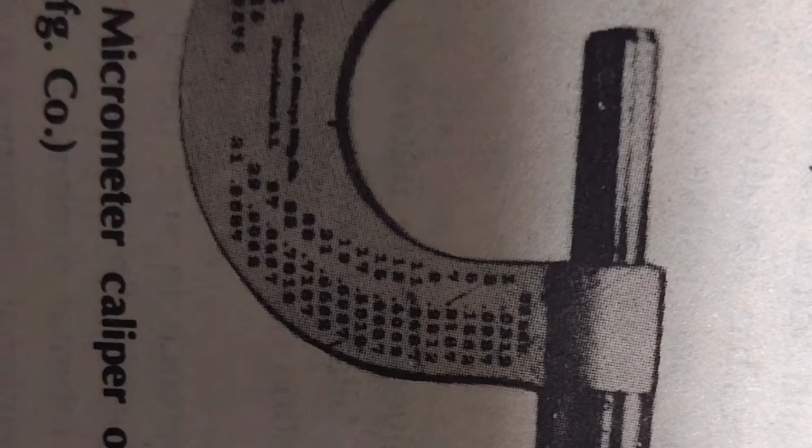Now this figure. In 1885, the same man introduced a new model which is almost identical with those in use today. Compared with the rule, the micrometer is a newcomer in the field of measurement.

The regular micrometer, usually referred to in the shop as a mic, is used for measuring outside dimensions. It is available in many sizes. There are several other types of micrometers, but all follow the same fundamental principle.

As we say, the mic is probably the most commonly used precision measuring tool. A standard micrometer designed to take readings from 0 to 1 inches is shown in this figure.

In this figure, the different parts are also shown, such as frame and anvil, spindle, hub and thimble.

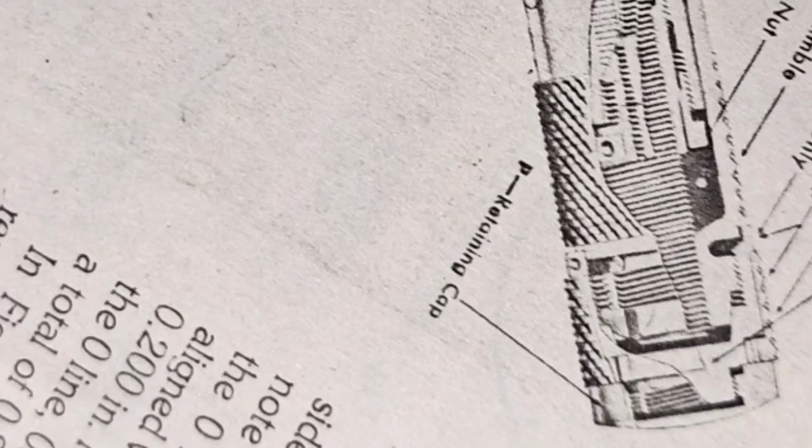In general, the use of this presents little difficulty, but a certain degree of skill and appreciation of their precision construction is required if accurate measurement is to be attained. In common with all precision measuring instruments, considerable care is necessary in handling them to avoid unnecessary and costly depreciation.

Micrometer instruments manufactured in the United Kingdom should conform with the requirements of British Standard 870, external micrometers, British Standard 959, internal micrometers including stick micrometers, and British Standard 1734, micrometer heads.

It should be appreciated that the degree of accuracy in using these instruments is governed by the permitted tolerances in the standards.

For example, the maximum permissible error ranges in the traverse of micrometer screws is 0 to 0.0001 inches or 0.003 millimeter.

For British and metric reading micrometers measuring up to 12 inches or 300 millimeters, it is 0 to 0.0002 inches or 0.005 millimeter. For instruments measuring 12 to 24 inches or 300 to 600 millimeters, the tolerance is correspondingly greater.

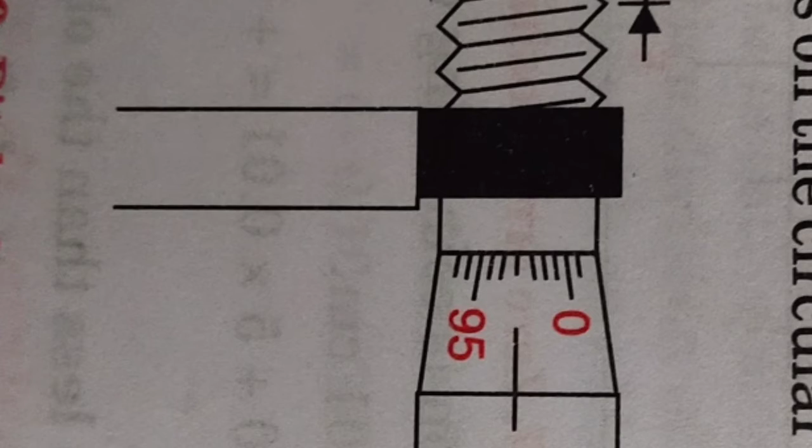Here I am giving the metric as well as the British one also, in inches and also in millimeter or micrometer, but here I am discussing about the millimeter one.

If each division is 1 millimeter and there are 100 divisions on the circular scale, then least count equals 1 millimeter by 100, that is 0.01 millimeter, which equals 0.001 centimeter, which equals 0.00001 meter, which equals 10 to the power minus 5 meter, or 10 micrometer.

Since the least count is of the order of 10 micrometer, the screw is called the micrometer screw. Screw gauge and the spherometer, which work on the principle of the micrometer screw, consist essentially of two scales.

Number 1, linear or pitch scale. It is a scale running parallel to the axis of the screw, graduated into millimeter or half millimeter. Number 2, circular or head scale. It is marked on the circumference of the circular disc or the cap attached to the screw.

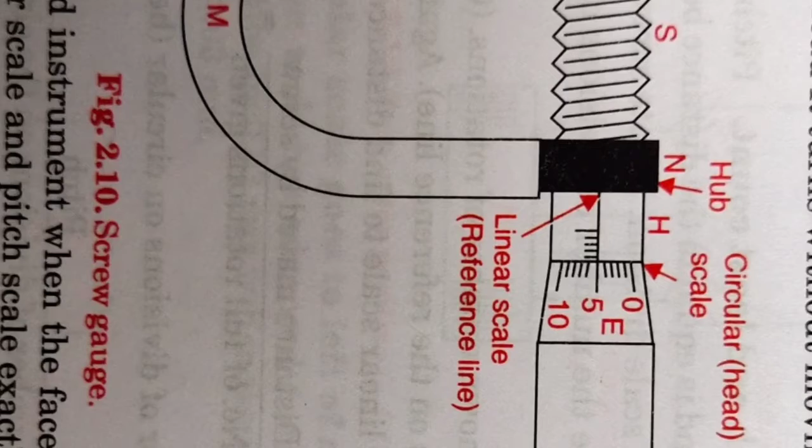In an accurately adjusted instrument, when the faces A and B are just touching each other, the zero marks of the circular scale and pitch scale exactly coincide.

Now, what is zero error and zero correction in this micrometer? In some instruments, either due to wear and tear or due to manufacturing defect, the zero mark of the circular scale does not coincide with the zero of the pitch scale when the faces A and B are just touching each other. Such instruments possess zero error and zero correction.

If the zero of the circular scale advances beyond the reference line, the zero error is negative and zero correction is positive. If it is left behind the reference line, the zero error is positive and zero correction is negative.

For example, if the zero of the circular scale advances beyond the reference line by 3 divisions, zero correction equals +3 into least count. And if the zero of the circular scale is left behind the reference line by 3 divisions, zero correction equals -3 into least count.

Now, backlash error. On account of wear and tear or loose fitting, there is some space left for play between the screw and the nut. In such instruments, if the screw is advanced by turning it in one direction and then rotated back, the screw may not move along the axis despite appreciable rotation of the head.

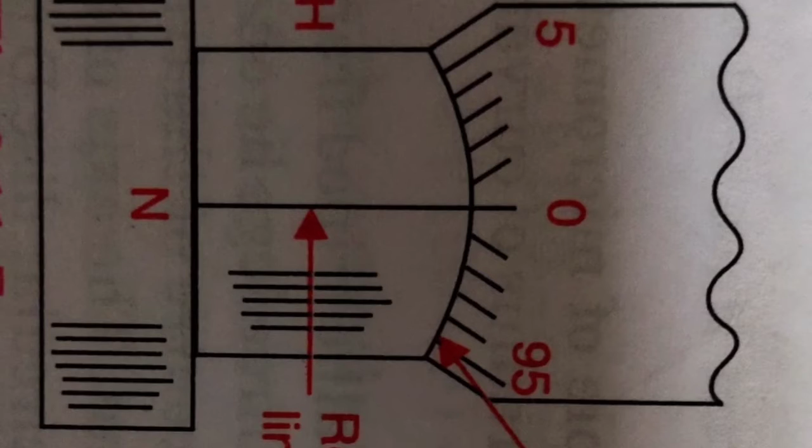Now number 2, zero mark of circular scale remains to the right of the reference line and does not cross it. Here I will give you a figure. Here the second division on the circular scale comes on the reference line. Zero reading is already 0.02 millimeter. It makes zero error plus 0.02 millimeter and zero correction minus 0.02 millimeter. Actual thickness will be 0.02 millimeter less than the observed, that is measured thickness.

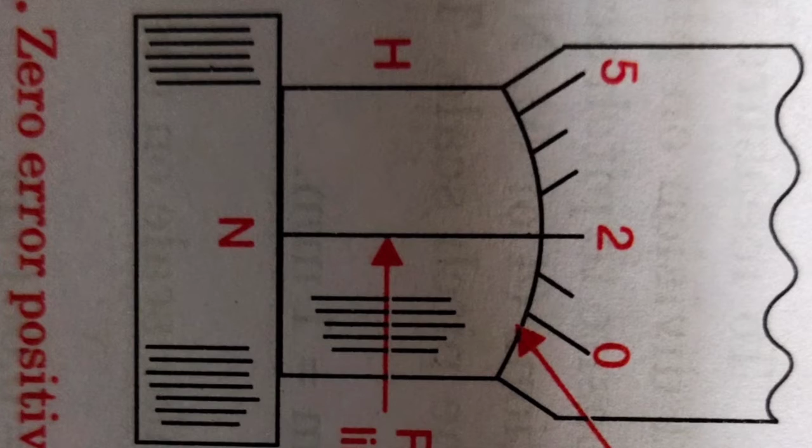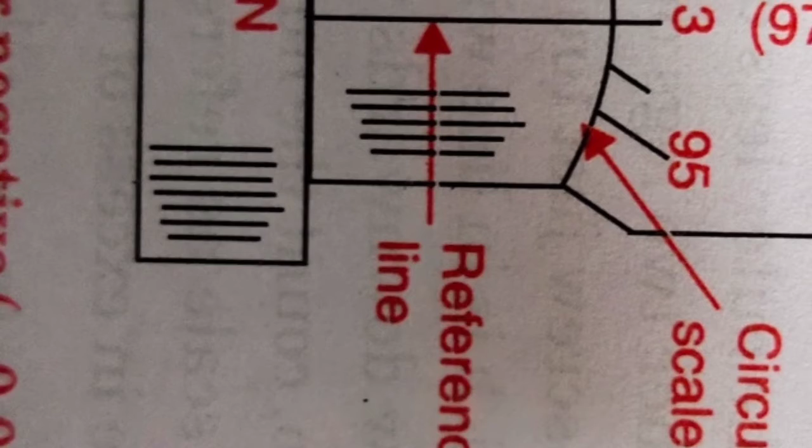Number 3, zero mark of circular scale goes to the left of reference line after crossing it. Here zero of the circular scale has advanced from the reference line by 3 divisions on the circular scale. A backward rotation by 0.03 millimeter will make the reading zero. It makes zero error -0.03 millimeter and zero correction plus 0.03 millimeter. Actual thickness will be 0.03 millimeter more than observed, that is measured thickness.

Now what are the graduations of a micrometer? The graduations on the sleeve of the micrometer are 25 thousandths, 0.025 of an inch, apart. Every fourth division on the sleeve is marked with a number from 0 to 10, thus identifying each 1/10th of an inch. There are graduations either in millimeters or in inches, two different systems.

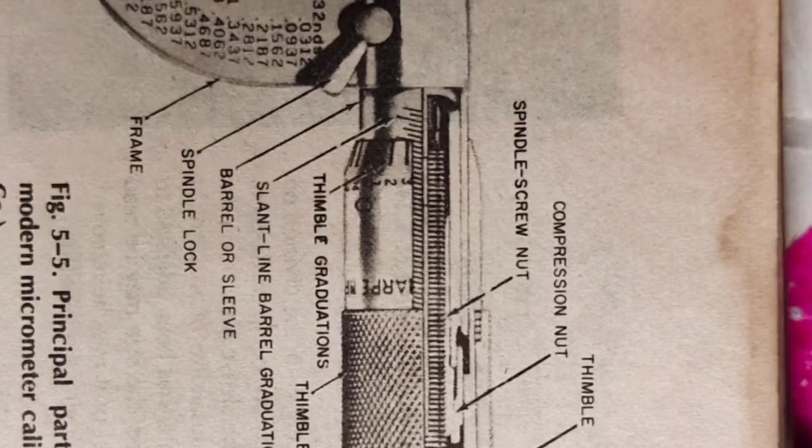The graduations of the thimble represent divisions of 1000, that is 0.001 of an inch. This is determined as follows. The edge of the thimble coincides with the 0 on the sleeve when the micrometer is closed. Each time the thimble is turned one revolution, it moves along the sleeve one graduation or 0.025 inches. The circular edge of the thimble has 25 equal divisions etched on it. So when the thimble is revolved just enough to equal one of the divisions, it has moved along the sleeve 1/25th, that is 1/25 of 25 thousandths, which is 0.001 of an inch. In some micrometers, only every fifth division is numbered.

Now the question arises, why does the thimble of a micrometer move along the sleeve exactly 25 thousandths, that is 0.025 of an inch, for each complete revolution of the thimble? The inside of the micrometer is threaded so that each time the thimble is turned, it moves along the sleeve in the same manner as a nut on a bolt.

These threads are made 40 to an inch. So when the thimble is revolved one complete revolution, it moves along the sleeve 1/40th, that is 1/40 of an inch, which equals the decimal fraction of 25 thousandths.

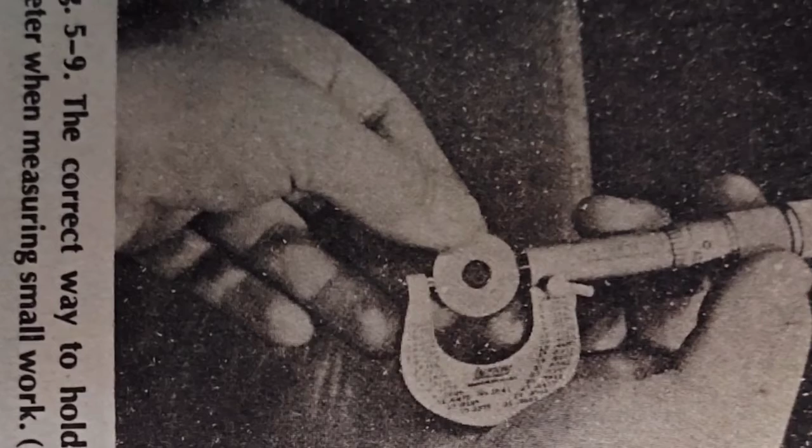Now, what is a ratchet stop on a micrometer? A ratchet stop, as given in the parts of the figure, is a device that prevents the use of too much pressure when adjusting a micrometer on a part to be measured. The ratchet prevents further turning of the thimble after the correct amount of pressure has been applied to the spindle to get an accurate measurement.

Now, can dimensions be accurately measured with a micrometer when the permissible variation is less than 1000, that is 0.001 of an inch? Yes, with ordinary micrometers it is possible to estimate one half of 1000, that is 0.0005 of an inch, when the revolution line on the sleeve comes in between two division lines on the thimble. For accurate measurements of less than 0.001 of an inch, a micrometer with a vernier scale on the sleeve should be used.

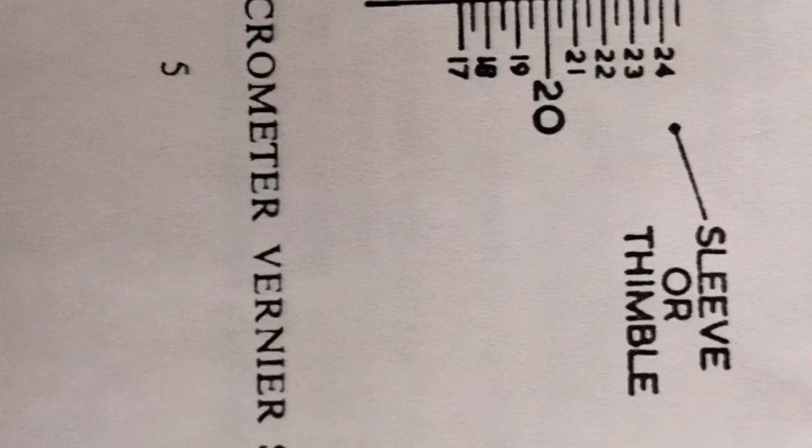Generally, vernier scale micrometer sleeves are graduated into 25 divisions and 25 half divisions. A convenient vernier scale length equals 9 half divisions of the sleeve scale, divided equally into 5 vernier scale divisions, and these are engraved on the barrel above and parallel to the full extent of the datum line. Thus, the vernier scale length is equal to 9 half divisions on the sleeve.

That is 0.0045 inches. It follows that the difference in width between each sleeve division, that is 2 half divisions, and each barrel division is 1/5 of a sleeve division. Each sleeve division is representative of 0.0005 inches. The difference is therefore 0.0001 inches. Now, when a sleeve graduation line does not coincide with the datum line, it is necessary to note the vernier scale division which does coincide and add the number of 10,000, that is 0.0001 of an inch, to the standard thousandth reading.

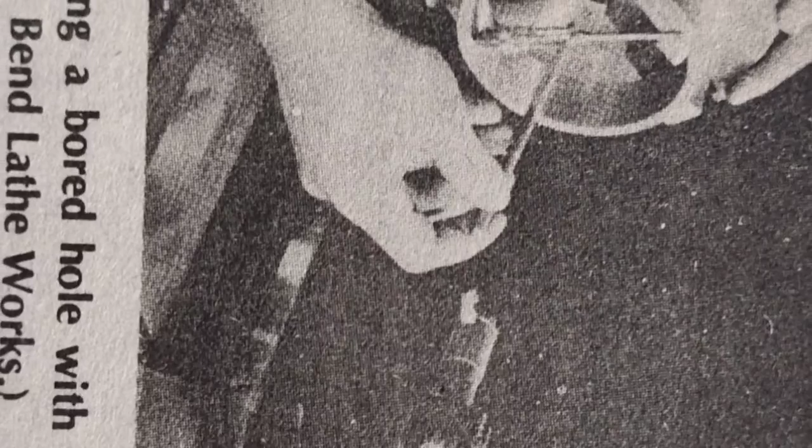Now, in the types of micrometer, first we will go for other than the standard type of micrometer for measurement of external dimension in British or metric measurement. There are several other types of a special category for various manufacturing processes, curve profiles, and for the measurement of soft materials, etc. Some of the more common of these and their particular applications are described in the following paragraphs.

Number one is variable range micrometers. These instruments are made with large frames, and a set of detachable anvils is provided to cover each stage of measurement throughout the total range. Ranges vary, but common examples are 0 to 6 inches, 0 to 12 inches, 12 to 24 inches, 0 to 50 millimeter, 200 to 300 millimeter, and 900 to 1050 millimeter. Stages of measurement are generally 1 inch or 25 millimeter. It will be appreciated that the shortest anvil will be fitted for the longest measurements and the longest anvil for the shortest. Various methods of anvil location are employed, but most anvils are provided with a flange or shoulder which abuts the frame face, and this ensures that the basic anvil setting is correct when the anvil is fitted.

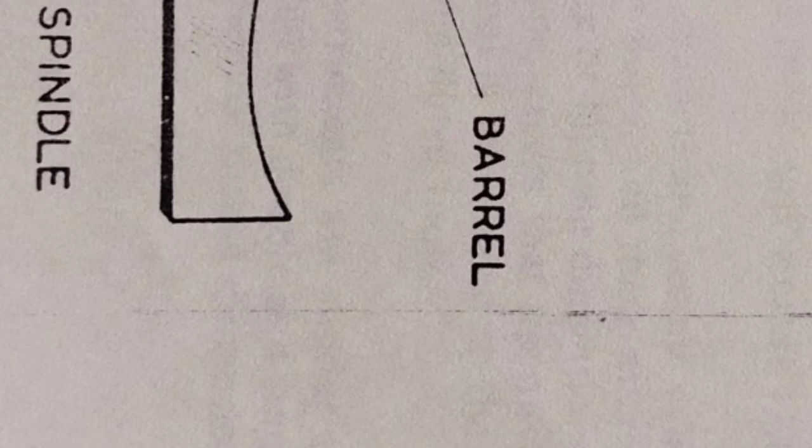Here one more thing is to be noted: the graduations are read in the same manner as a regular micrometer.

Now the tube micrometer. This micrometer is similar to the standard type except for the frame and the anvil. The frame is usually of single jaw C-shape, and the anvil is a vertical hardened and ground spindle post fitting into the frame at 90 degrees to the spindle axis.

Generally, these instruments are supplied with several anvils which differ in the diameter of the measuring tip, and this feature serves the instrument a wider range of tube thickness measurement. A tube micrometer is specially designed to measure the thickness of the material of piping, tubing and similar shapes.

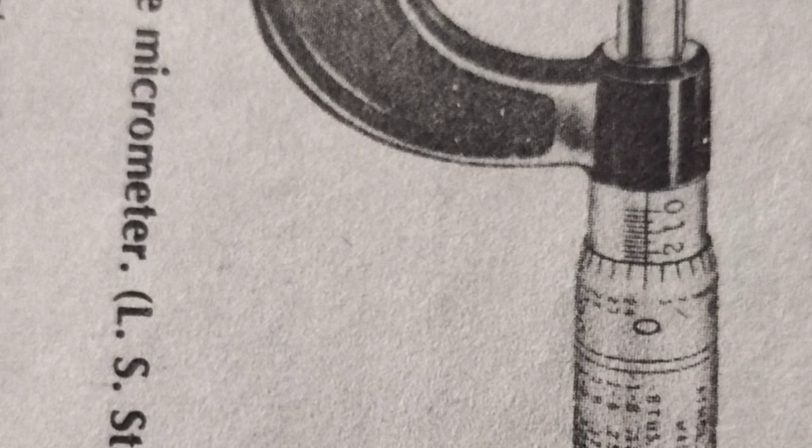Now what is an inside micrometer, which we have discussed, but let's see. An inside micrometer is designed with the same graduation as an outside micrometer and is adjusted by revolving the thimble in the same way. It is used for taking internal measurements where greater accuracy is required than can be obtained with inside caliper or telescopic gauges.

It is available in many sizes. Now the figure shows an inside micrometer in use, and shows the inside micrometer caliper.

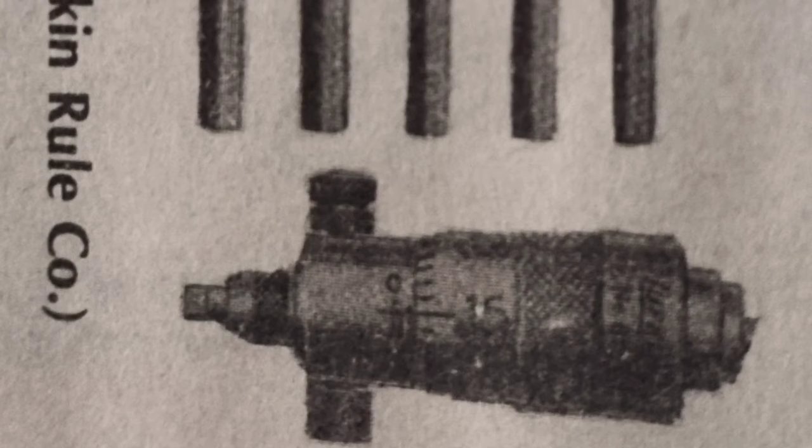Now what is an indicating micrometer? An indicating micrometer combines the precision of the dial indicator for uniform contact pressure with the accuracy of the micrometer screw for measuring.

The graduations on the sleeve and thimble are the same as on a regular micrometer. The indicator dial registers divisions of 1/10,000, or 0.0001 of an inch. In measuring with this type of micrometer, the size is noted on the sleeve in thousandths of an inch, and then the number of 10,000ths shown on the dial by the indicator finger is added.

The indicating micrometer may also be used as a comparator. For this purpose, the spindle may be clamped in position to a required dimension.

By tightening the ring nut on the spindle when it is to be used in this way, the two larger hands of the indicator are adjusted on each side of zero to indicate the amount of variation permitted above or below the required dimension. If the indicating finger is moved outside of the two hands, then the part being measured is too large or too small, depending upon which direction the finger moved.

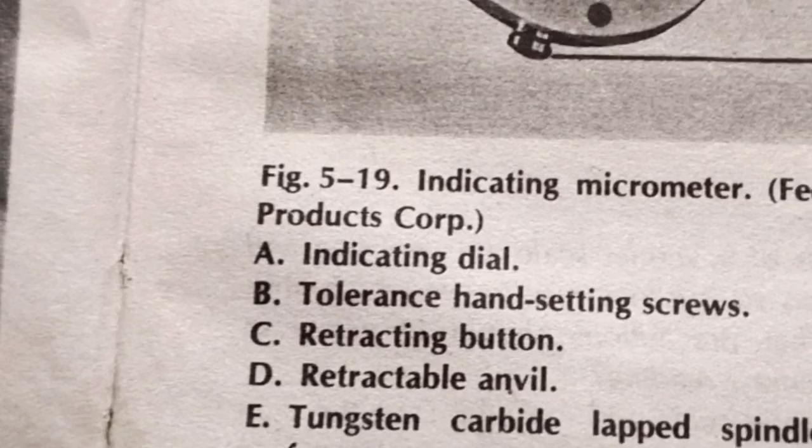Next is, what is a screw thread micrometer? A screw thread micrometer is similar to an outside micrometer except that the spindle is pointed to fit between 60 degree V threads, and the anvil is shaped to fit over a 60 degree V thread.

It is used to measure the pitch diameter of a thread. Screw thread micrometers are available in many sizes depending on the pitch of the thread to be measured.

These instruments are similar to the standard type except that the spindle and anvil are provided with double and single points respectively for the appropriate angle for the measurement of thread dimensions of precision screw threads.

The next type is the caliper micrometer. This type of micrometer, shown in the figure, is particularly suited to the measurement of small internal diameters. It consists of the standard barrel and spindle assembly with an offset pair of jaws, indicated by a bracket, attached to the inner end of the barrel.

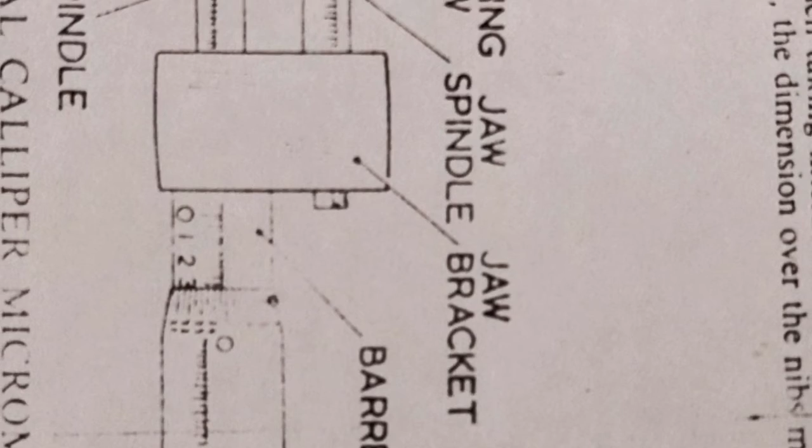Now the V-block micrometers. Drills, taps, reamers and certain cylindrical cutting tools are manufactured with 3, 5 or 7 flutes, and these micrometers are necessary for the accurate measurement of the cutting or lapping dimensions of these tools. The micrometer is similar to the standard type except that the anvil is integral with the frame and adjacent to the spindle. The anvil is V-shaped to the appropriate angle to facilitate measurement of 3, 5 or 7 fluted tools.

Now micrometer heads. As the term implies, these measuring devices are in effect the barrel, thimble and spindle of the orthodox micrometer. They are designed primarily for assembly into suitable bench brackets, and a set of matching extension pieces is supplied to fit over or into the micrometer head spindle to give various stages of measurement over the range. When mounted, the head with the appropriate extension piece is particularly suitable for tool setting checks, for adjustable gauges, and quick checking of fixed points of measurement.

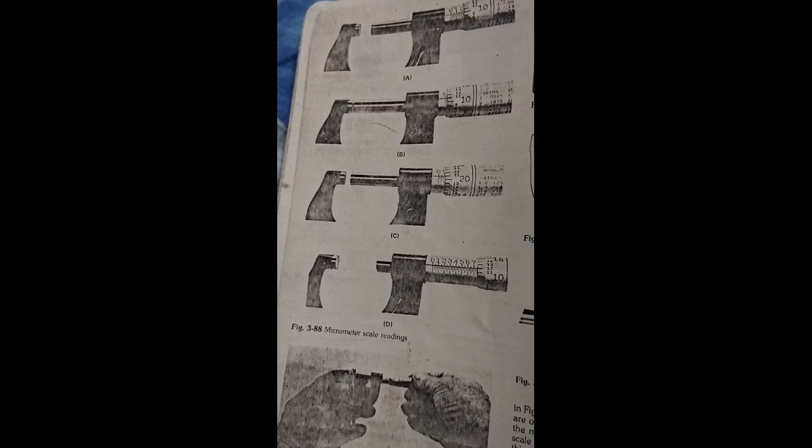Now in another figure, the scales for 4 different micrometer readings are shown. Examine these settings and see if your readings agree: A is 0.235, B is 0.036, C is 0.121, and D is 0.762. To develop proficiency in the use of a micrometer, the technician should obtain one.

The technician should obtain a micrometer and practice taking readings on a variety of small objects. These readings should be compared with similar readings taken by an experienced technician for accuracy.

It will be noted that the micrometer shown in this figure has a part called the cam lock at the frame, and a ratchet at the end of the thimble.

The purpose of the cam lock is to lock the spindle in place after a setting has been made, so that there will be no change in the reading when the micrometer is removed from the work. The purpose of the ratchet is to provide a uniform pressure for taking readings.

This figure shows the micrometer being used to take a reading on a small part. The pressure of the spindle is applied through the ratchet. The ratchet and spindle are turned to the right by means of the ratchet, and when the proper pressure is reached, the ratchet will slip, thus preventing any further pressure from being applied to the spindle. Thus the ratchet provides uniform pressure for each reading taken with the micrometer.

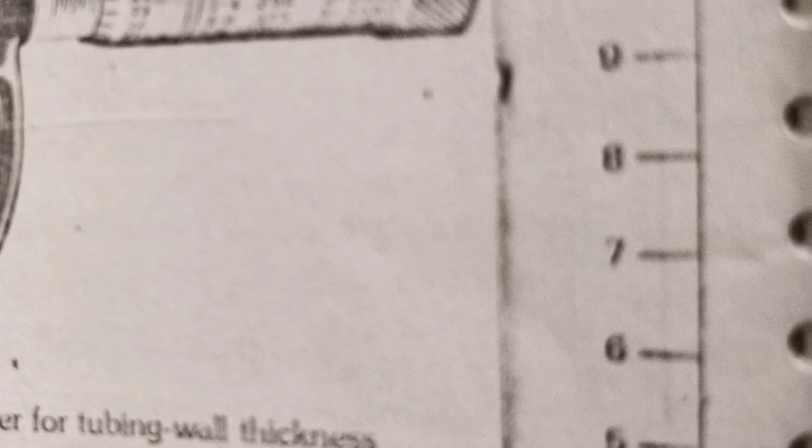The next figure shows a micrometer which has a 60-degree angle on the spindle and anvil, making it suitable for measuring screw thread diameters. When it is necessary to make fine measurements accurate to 0.0001 inches, a vernier micrometer is used. A micrometer with a vernier scale is shown in this figure.

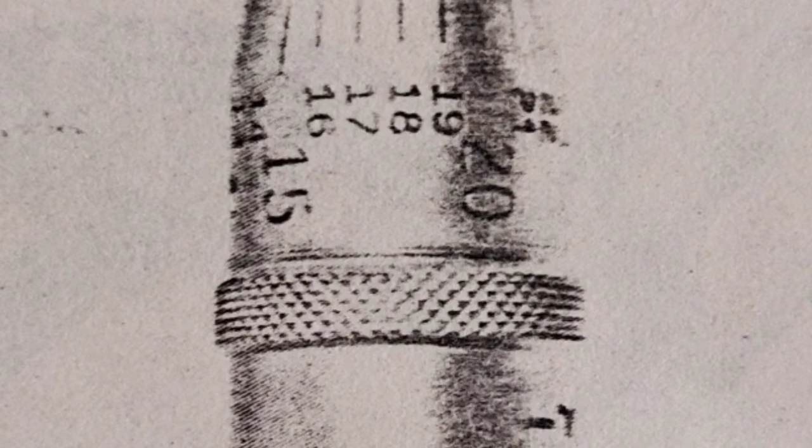The reading is taken to the nearest thousandth in the normal manner, and the ten-thousandth reading is taken from the vernier scale. The vernier principle is based upon the comparison of a scale of 10 divisions with a scale of 9 divisions, but having the same length as the 10 division scale. This is illustrated in this figure.

It is apparent that the divisions in the B scale are 1/10 larger than the divisions in the A scale. On the micrometer, the B scale is on the thimble and another scale is on the sleeve or hub. If we assume that the thimble will not turn to an even thousandths measurement, then the difference will be indicated on the vernier scale.

The study of the figure will show that a reading of 0.1724 is indicated. This may be shown as follows: sleeve 0.150 (A), thimble 0.022 (B), vernier 0.0004 (C). This equals 0.1724.

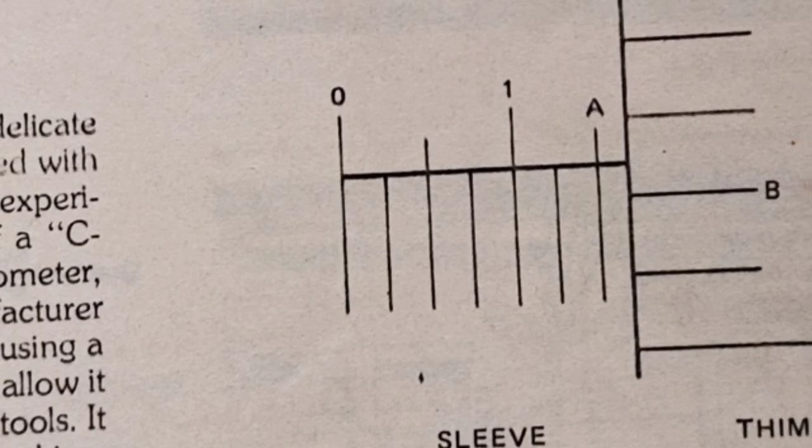When the micrometer reads in even thousandths of an inch, the zero line on the vernier scale is aligned with a line on the thimble scale. If the thimble scale is short of the sleeve scale's zero line by 0.0001, the number 1 line on the vernier scale will be aligned with a line on the thimble scale. Thus we see that we can read the ten-thousandths by noting which vernier line is aligned with a thimble scale line.

It must be pointed out that a micrometer is a delicate precision instrument and therefore must be handled with great care. Cases have been known in which an inexperienced person has used a micrometer in place of a C-clamp. This of course will usually ruin the micrometer, which will then have to be returned to the manufacturer for repair. The technician should always practice using a light touch with the micrometer and should never allow it to be dropped or thrown into a toolbox with other tools. It should be kept in its own case or wrapped in a soft cloth and placed in a special compartment.

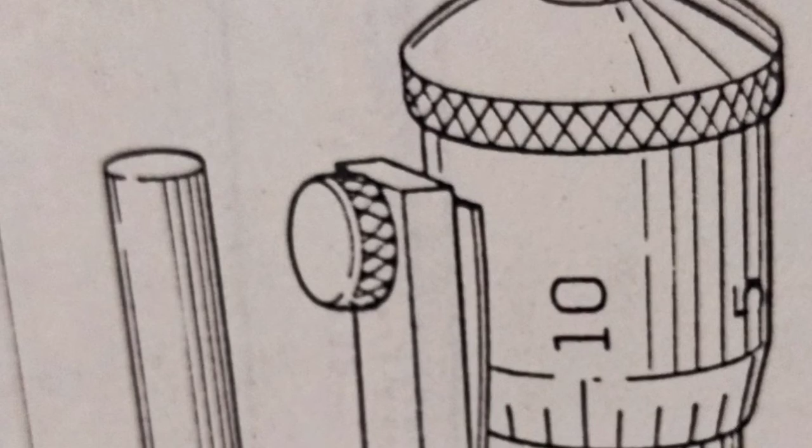Now, micrometer caliper, from another text. There are four types of micrometer caliper, each designed for specific use. The four types are commonly called outside micrometer, inside micrometer, depth micrometer, and thread micrometer.

Micrometers are available in a variety of sizes: 0 to half inch, 0 to 1 inch, 1 to 2 inch, 2 to 3 inch, 3 to 4 inch, 4 to 5 inch, or 5 to 6 inch sizes.

The outside micrometer is used by the mechanic more often than any other type. It may be used to measure the outside dimensions of shafts, thickness of sheet metal stock, diameter of drills, and many other applications. The smallest measurement which can be made with a steel rule is only 1/64 of an inch in common fraction.

and 1/100th of an inch in decimal fraction. To measure more closely than this, in thousandths and ten-thousandths of an inch, a micrometer is used. If a dimension given in a common fraction is to be measured with the micrometer, the fraction must be converted to its decimal equivalent.

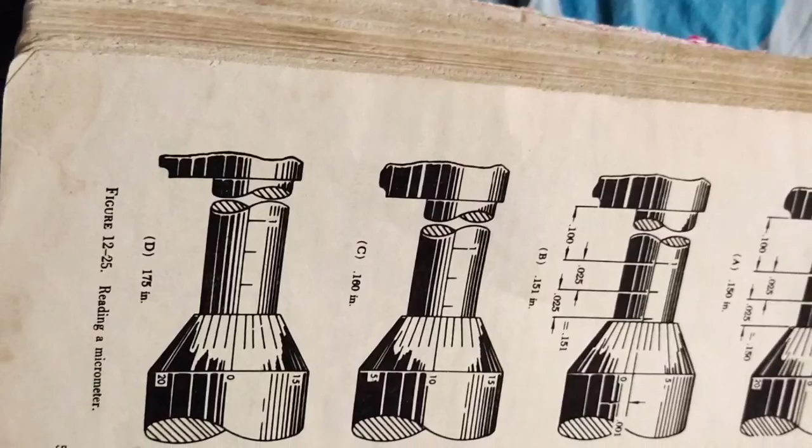This figure shows several simple readings.

In reading a micrometer, an excellent way to remember the relative scale values is to remember that the 0.025 inch barrel scale graduations are established by the lead screw of 40 threads per inch. Next, the thimble graduations divide the 0.025 inch into 25 parts, each equal to 0.001 inch.

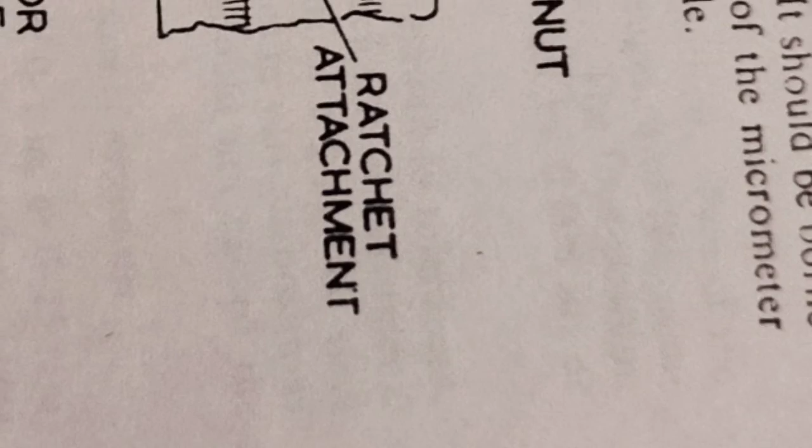Now, micrometer testing, general testing. It will be appreciated that micrometers which have been adjusted and checked for measuring face flatness by slip gauges reading in various face positions, and for parallelism by concentricity checks in the anvil and the spindle, will be sufficiently accurate for most measurements and tolerances in the assembly and construction of aircraft.

Now, final testing. Micrometers which are to be used for small tolerance standard room or gauge room work should be tested to a final degree of accuracy. The following tests — flatness, parallelism, and screw calibration — are recommendations from British Standard 870.

Now flatness. This is best tested by means of an optical flat brought into contact with each face in turn. Imperfection will be shown by a number of colored interference bands on the surfaces, and the number and shape of these will indicate the degree of flatness present.

The specified tolerance for flatness is 0.00005 inches, and this is represented by a maximum number of 5 bands of similar color on either of the faces. Note: the bands are more distinct if the test is made in the light from a mercury vapor lamp, particularly if viewed through a green filter.